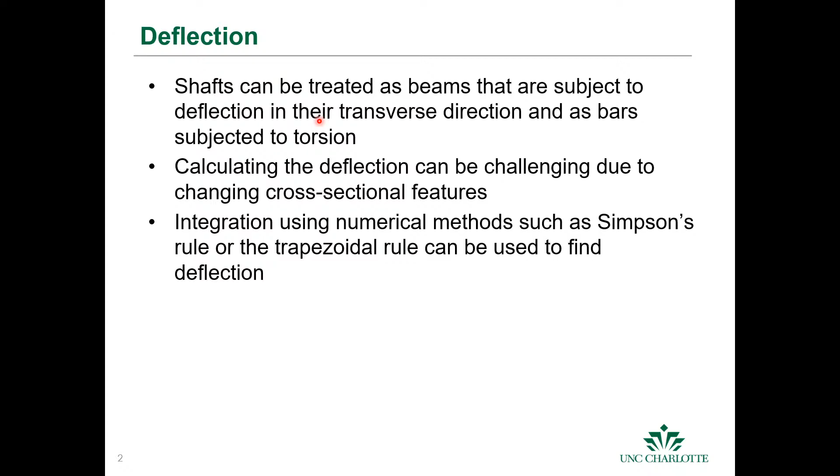When we need to calculate the deflection in a real design, it can actually be quite difficult because of the different cross sections, different cross-sectional areas, different attachments, and in that case there's an awful lot of software that can be used to simulate that using FEA. But an approach that you can do that's relatively simple, such as using numerical methods and an integration such as Simpson's or the trapezoidal rule, can be used to find the deflection. I'll show an example of that.

This is the same thing that we've seen before in statics, probably mechanics of materials, and earlier in this class. The angular deflection is the applied torque times the length of the shaft, over the shear modulus—which is the equivalent of the Young's modulus, except Young's modulus is axial and shear is in torsion—times the polar moment of inertia, or in other words, looking at the area moment of inertia distributed away from the axis that runs through the center of the shaft.

The ratio of the applied torque to the resulting angular deflection is the stiffness of the bar. If we apply a load and get a deflection, that's Hooke's law that we've seen in the linear case or with springs, and it's the same in the torsional case. If we apply a torque and get some unit of angular deflection, then that ratio is the stiffness.

It's a measure of how much the material angularly deforms for an applied torque, and we can rewrite that in terms of our deflection equation if we'd like. Then we can calculate the stiffness of a bar from its material properties, G, its cross-sectional area properties, J, and its length.

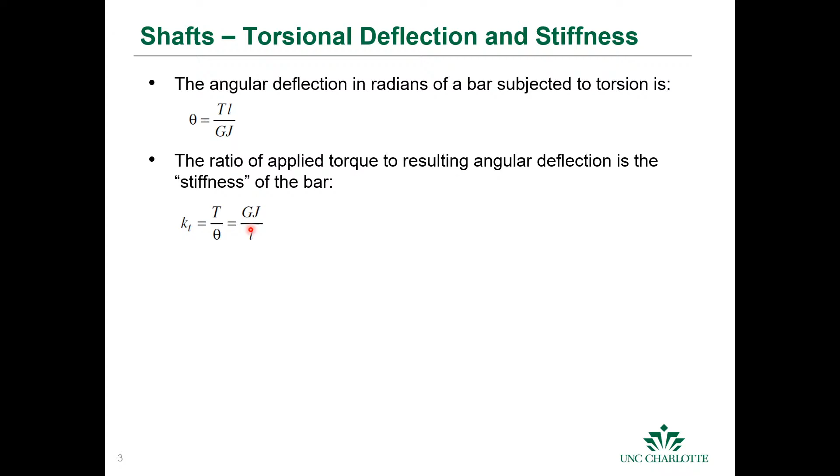If we have a changing cross-sectional area, as we do in many shafts, we have to deal with that by looking at the deflections experienced from each section of the shaft and treating them as springs in series. Our overall deflection will be the torque applied to the shaft over the shear modulus, assuming we all have the same properties.

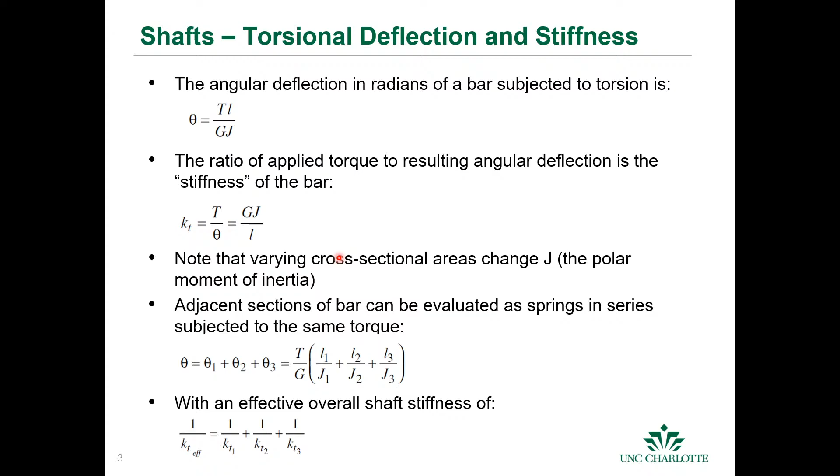If not, you would distribute that through for the respective properties, and then the length and the polar moment of inertia for each section of the shaft to get our overall deflection from the shaft. We can also treat it as an overall stiffness of the shaft, and use that to get a feel for how the shaft will deflect due to an applied load.

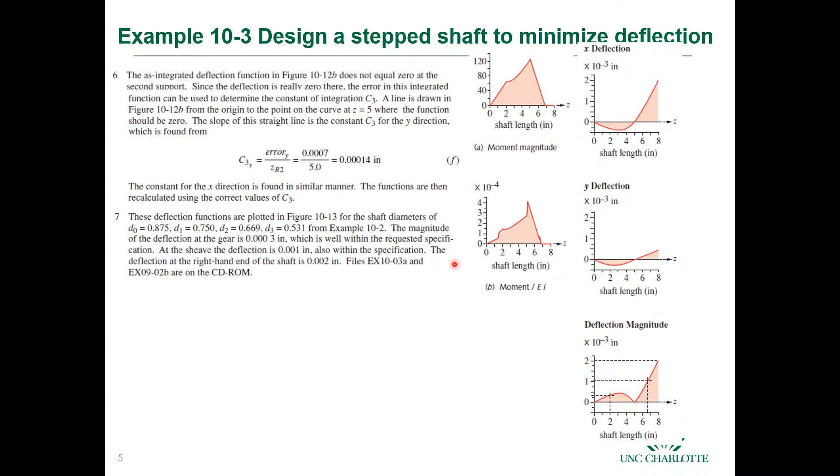I would go back through this and the previous example in 10-2, from the last section, and make sure that you understand what's going on.

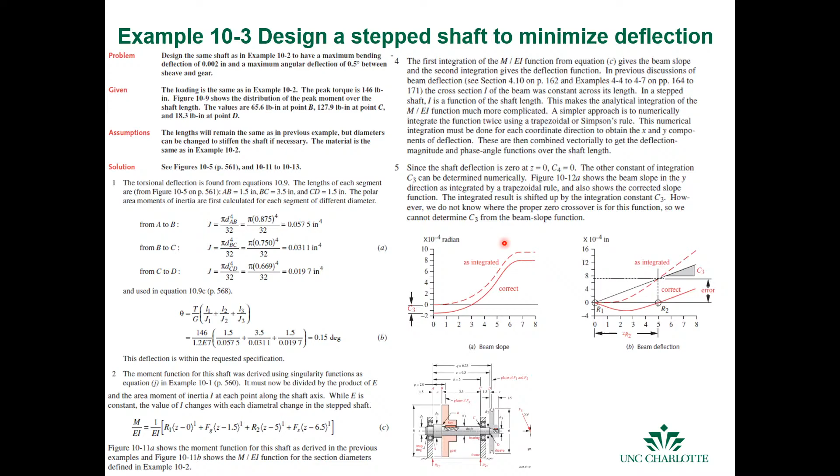So when we need to transmit torque through shafts, we could go from a shaft to a hub.

One way to transmit torque is to use a key. There are 3 common keys: parallel keys, tapered keys, and Woodruff keys. The ASME definition is that a key is a demountable machinery part which, when assembled into a key seat, provides a positive means of transmitting torque between the shaft and the hub. So if we have a shaft here and a hub that we need to spin around it, we can use a key to transmit the torque from the shaft to the hub.

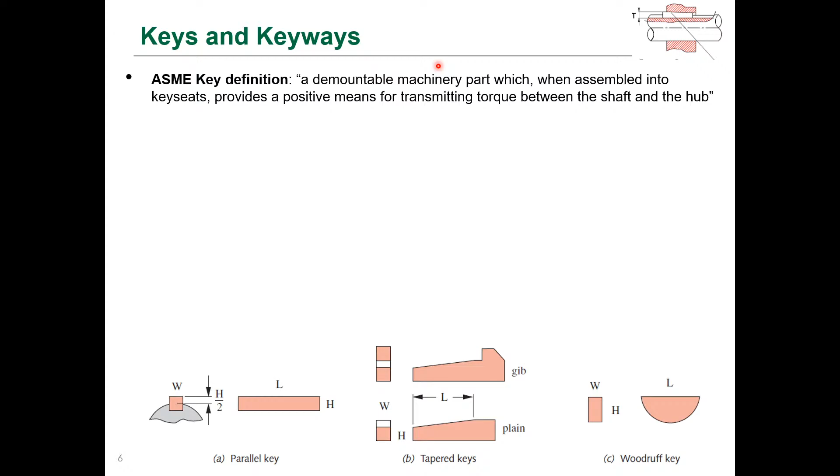Now, more area of the key is usually in the shaft than the hub, although the design guideline is to split the height between the shaft and the hub. So we have parallel keys. These are square keys, low cost, made with cold rolled steel, typically with a slightly negative tolerance, so that a 1/4 inch end mill can machine the slot into the shaft, for example. These are recommended for smaller shafts, up to 6.5 inches, or up to 25 millimeters if you're using the European standard or ISO.

The height is split between the shaft and the hub of the key. So you place the key in, you want half of it to sit in the shaft and half of it to slide into the hub. Then you slide the hub over the key, and you can spin the shaft and it'll move the hub. If you need to deal with higher loads, you can use 2 keys, one at the top, rotated at least 90 degrees so that you can transmit more torque. Otherwise, if you have too much torque, you'll cause the key to fail.

If you have alternating loads, there's a small tolerance in the key, between the key and the shaft and between the key and the hub. If you have a precision application and you apply a positive, clockwise torque, and then apply negative torque, it's possible that when you apply the opposite direction torque, you get a small delay before you get output angular displacement. That lag between the input and output is what we call backlash.

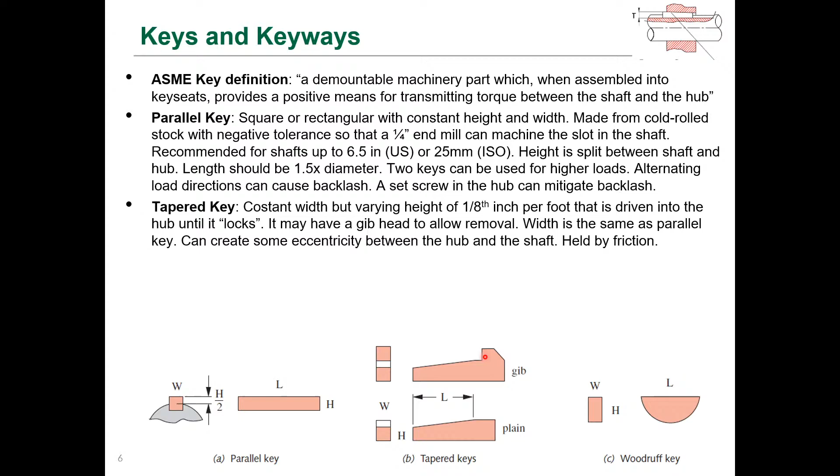We also have tapered keys. They have constant width, and the height varies 1/8 of an inch per foot that's driven into the hub until it locks. What you're really doing is kind of smashing the key in there. The hub itself will have a taper, so when you put the key in, it slides down that taper and seats inside the shaft. It's a way of locking it with friction. If you get your tolerances right, it'll snap in there and stay. Some have gibs, which are little knobs you can use to pry them out if you need to remove them, and these are held by friction.

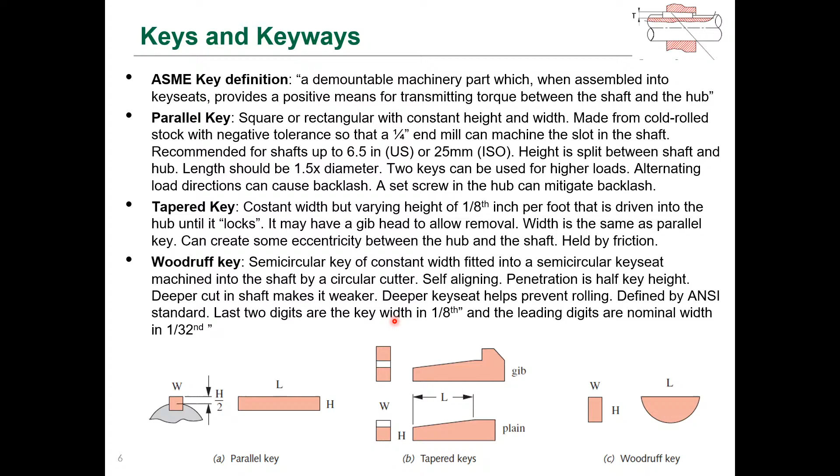We also have the Woodruff key, a semicircular key of constant width all the way down, and the penetration is half the key height. These are deeper cuts into the shaft with a circular cutter, making the shaft weaker, but putting more area of the key into the shaft. These are defined by the ANSI standard. They have a numerical value where the last two digits are in eighths of an inch, and the leading digits are in 1/32 of an inch, representing the nominal width. Actually, the first number is the length, so I need to fix that.

So these are some standard typical values that you might see. What's important is if you're designing a machine, you need to transmit the torque from the shaft to the hub. You have these range of values here, for the diameter of the shaft in inches, and you can see they're not recommended for keys over 6 inches.

This is the metric version, and if you come down here, you can see for a shaft that's 2 inches, you want a 1/2 inch wide key, and if you're going to use a set screw, you want a 1/2 inch set screw, which matches it. You'll see that the set screw size slightly lags the key width size, except at 1/2 inch.

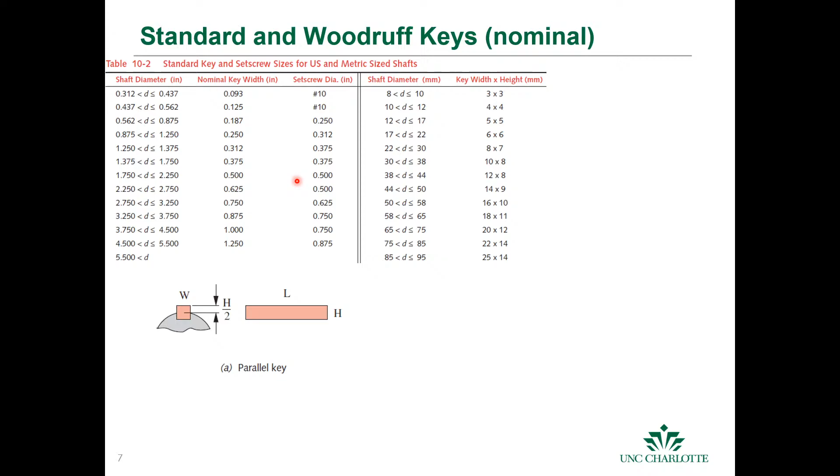The ANSI standard for Woodruff keys, as I said earlier, the numbers correspond to 32nds and 1/8. So 8/8 for the last two digits is 1, and 12/32 is 0.375, and that's how we get our key widths, but they come in the key number. So you can pick either the standard keys or Woodruff keys to transmit the loads. They're used in a variety of applications.

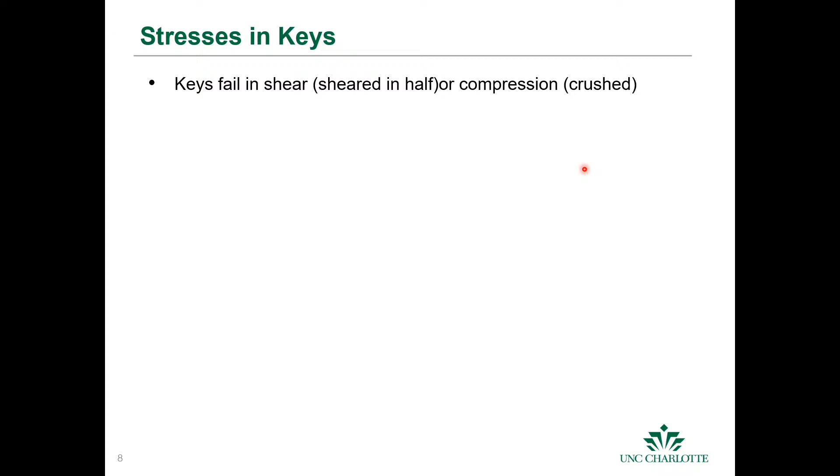Keys will fail either by shearing, where you rip it in half, or by crushing when you compress them or exceed their compressive yield strength.

For shear failure, it's easy. We just look at the force that's applied to half of the area of the key, and it's in simple shear. So the shaft is going to be on half the area, and the hub's going to be on the other half of the area, and the stress on each area is going to be the force over the area in shear.

Usually the area that you use for shear is going to be the smaller of the shaft or the hub areas, and that's because that's the area that's going to fail first, because you have the same force over a smaller area, meaning you're going to have higher stress.

If you have time-varying torque, then fatigue failure is possible, and you would have to compute the von Mises mean and alternating stresses, if you had, say, a mean stress with an alternating stress. Obviously, if you just have an alternating stress, you would actually be in shear, so you need to take into account those shear stresses with the von Mises equivalent stress, and then calculate your fatigue like that.

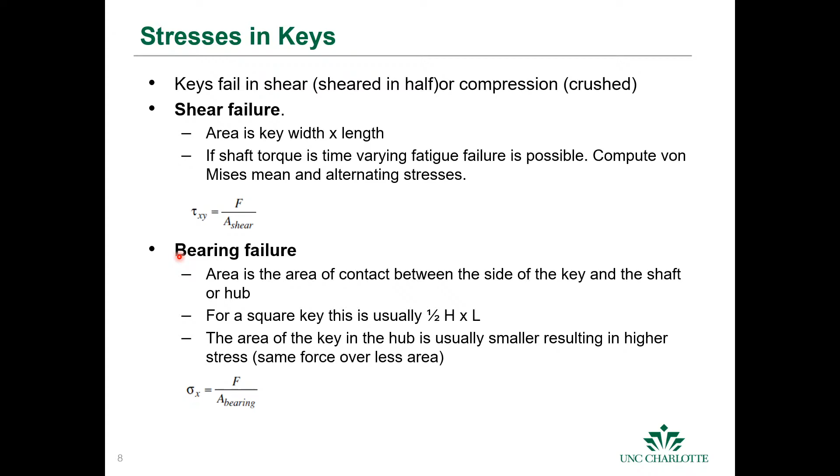Bearing failures are where the key is actually crushed. This area is actually the part of the key that's subjected to the shear. If we go back, it's actually this area that is the shear area, because that's the shear plane between the two surfaces.

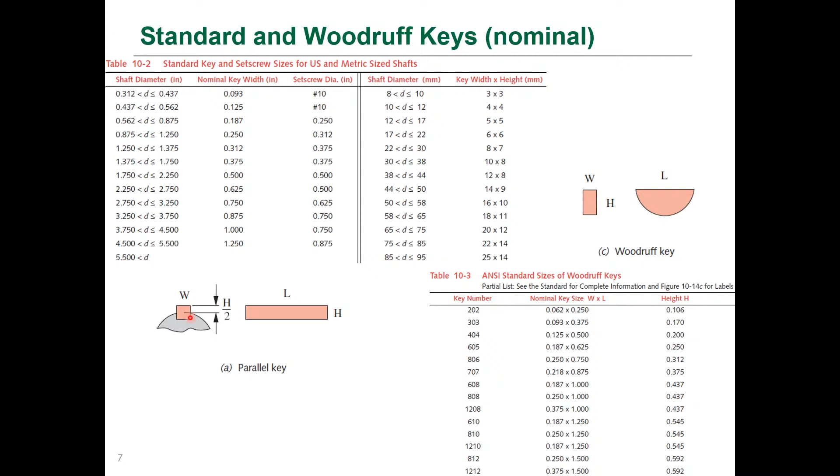If we look at the shear failure, we're looking at this area right here on the side of the key. In that case, it's the width times the length, and in the case of bearing failure, it's half the height times the length, and that's the side of the key. And that side, you obviously want to use the minimum of the area that it is in contact with, so usually that's in the hub.

And if you exceed the stress to cause it to yield, then you have compressive yield failure. So those are how keys fail.

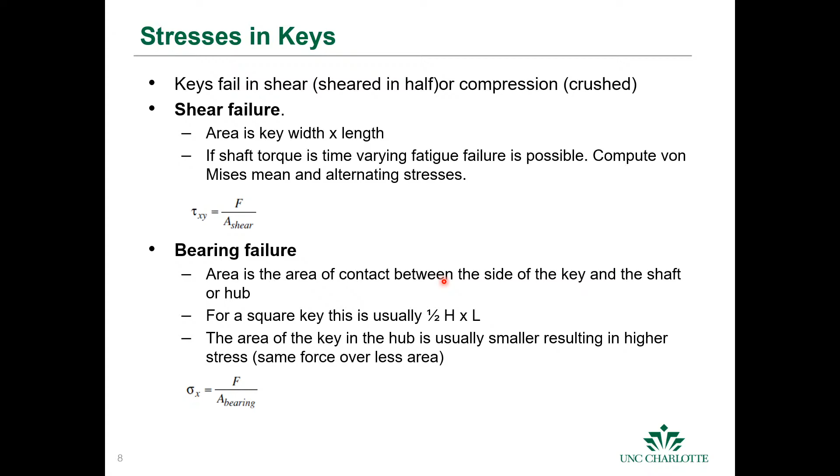They are also subjected to stress concentrations, as are everything else that has large changes in cross-sectional area. Since the keys are subjected to shear, they're typically made from softer, lower carbon, ductile steel. If you're going to be in a corrosive or marine environment, then you'd want to use brass or stainless. Square keys are typically made from cold rolled bar stock that are just cut to length, so they're pretty cheap, and they're designed to fail first.

As we saw for the standard keys, the diameter of the shaft determines the key width, and once the width is defined, the height is also defined by the standard keys. You can use a straight key, and that straight key can be as long as the shaft, but in general, you want it to be less than 1.5 times the diameter.

The reason for that is because you're going to have twisting due to torsional deflection, and you want to avoid excess twisting so that you don't twist the key out. So depending on your application, you just have to be aware of that: if you get the deflection and you have a long shaft, based upon the slides we saw at the beginning of this lecture, a longer shaft is going to have much larger deflection, and if you have a key that runs the whole way, then you're going to be twisting the key.

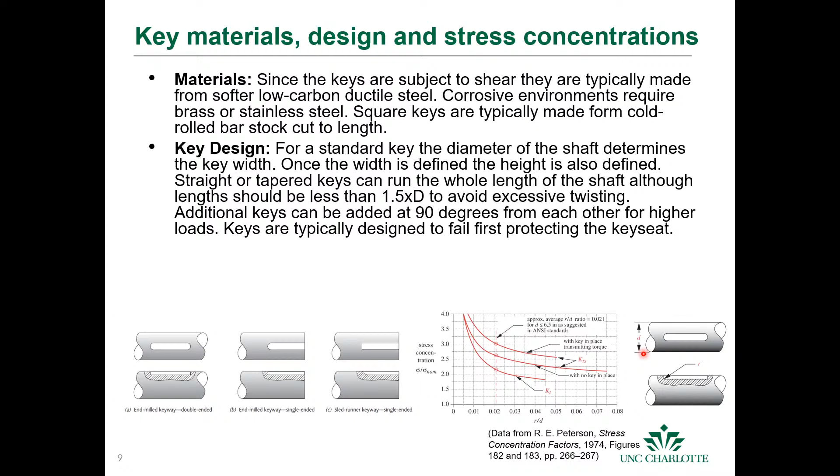These are the stress concentration factors. They're analyzed in the same way that we've done them. There's plenty of resources you can look up, but the point is that depending on the radius to diameter ratio for the key, then you'll get a factor that can be 2 to 4 times.

So what you might do, if you're trying to do a ballpark design, is just say that the stress is going to be about 4 times higher at the key. Or if you're designing something that's going to be transmitting loads, you can't just design the shaft—you have to consider how that shaft's going to transmit that load. It's going to use a key, so you can use a value of at least 2 up to 4 for a stress concentration, so that you're multiplying the stress you calculate by the actual way that you're going to use the machine.

And that's what's a little bit different about machine design, other than statics or mechanics of materials—to make the machine actually work, we have to use real hardware and real components. So these stress concentrations, even though we can calculate the stresses, we really have to pay attention to them and make sure that we are multiplying the stresses by an appropriate value. And obviously we'd use the limiting stress case of where we expect the part to fail, just like we do in all the other cases for stress concentrations.

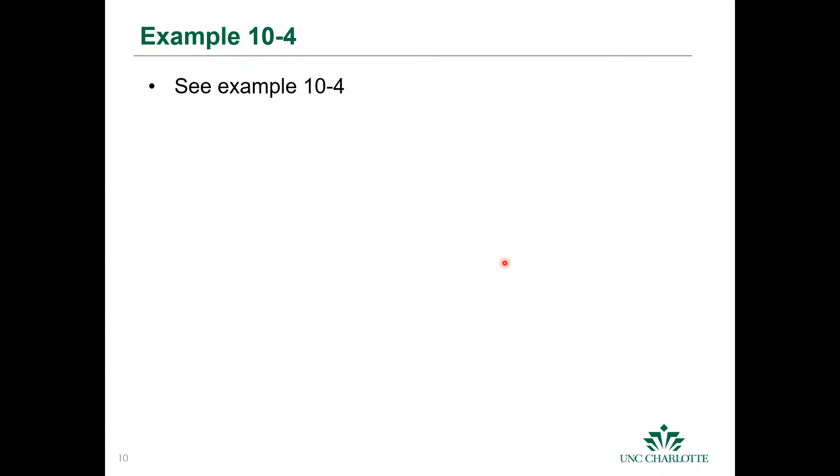At this point, I'd like to remind you to read your book. Your book is good. I try to do a good job of making the information more accessible through these lectures, but there's really no substitute for you to get into the material and read and make sure you understand, especially if there's something you don't understand about these slides.

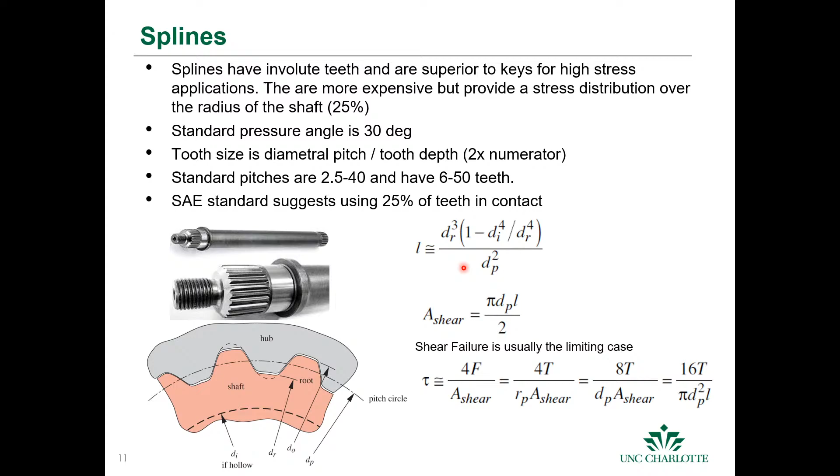All right, so now let's talk about interference fits.

Interference fits are another way for us to transmit torque. The torque is transmitted through friction. They're also used for locating pins and mounting bearings and a variety of other applications. This is the general case, particularly for shafts if we're trying to mount something on the shaft.

So what is an interference fit? An interference fit is either a press fit or a shrink fit. A press fit is where we have a shaft that's larger than the hub so that we have interference, and the hub is pressed on. If we maintain stresses that are below the yield stress, then we don't plastically deform the hub or the shaft when we join them, and we can get them to seat inside of each other. They get the shaft to seat inside of the hub, and then use friction to hold them together.

So if you've ever tried to remove a bearing, you know that a press fit can be a good way of joining a shaft, especially if it's a driven shaft and is fixed at the other end, so that you don't require any locating features and you have the bearing that's grounded. It's a good way.

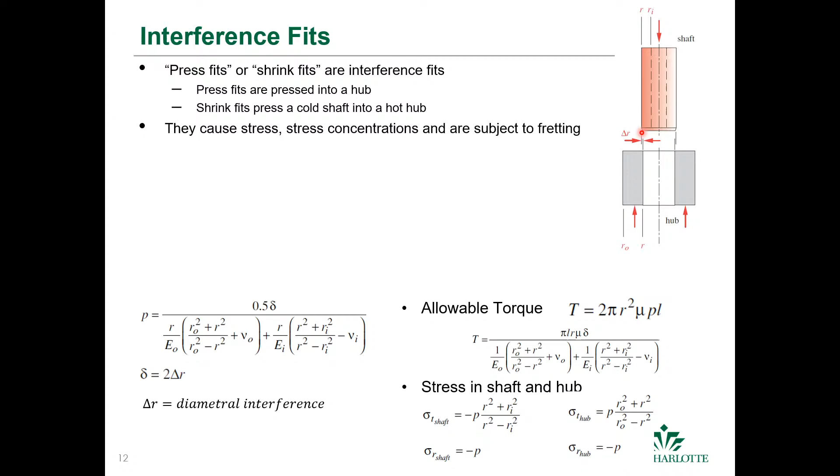When you use an interference fit, because you're causing two materials to interfere with each other, you're obviously going to get stress. That stress could cause other problems which relate to the surface failure lecture, which is actually uploaded to my site, and you also have a video of that from Norton, but we haven't discussed it yet. You can get fretting failure or corrosive fretting between the hub and the shaft when those two materials are rubbing against each other. They can cause surface cracks.

There's something called the rule of thousandths, and it says you want to be 1 to 2 thousandths units of interference per unit diameter. These are not inches, these are any units. Larger diameters use a 2-thousandths rule, and smaller diameters use a 1-thousandths rule.

These are not necessarily in inches. So if you have metric units, you still want the interference to be between 1 to 2 thousandths of the diameter. For example, if we have a 2-inch diameter shaft, we would want to have 4 thousandths of an inch of interference, because it's a larger diameter, so we use the 2-thousandths rule.

Between large diameter and small diameter, diameters up to 1 inch can use the 1-thousandth-of-an-inch rule. This is the machinist rule of thumb, which is different from the rule of thousandths, even though they have the same interpretation for some lengths. The machinist rule of thumb, if you're going to use a press fit, is 1 thousandth of an inch of interference, not clearance, interference, up to a 1-inch diameter shaft, and 2 thousandths of an inch for diameters from 2 to 4 inches in diameter.

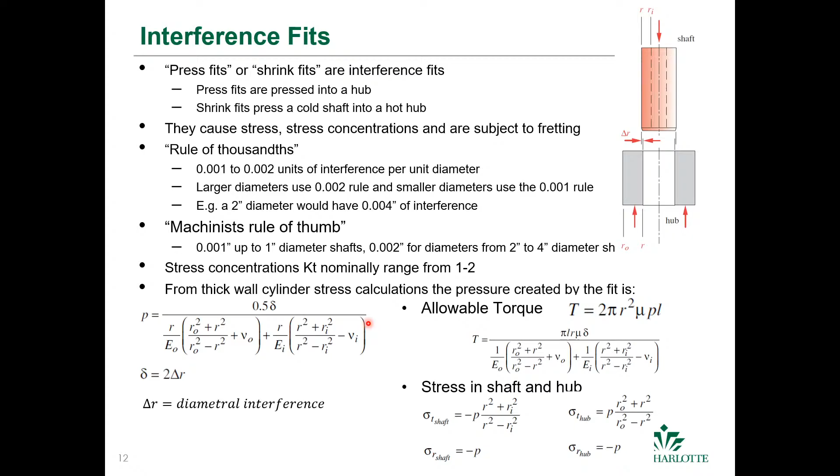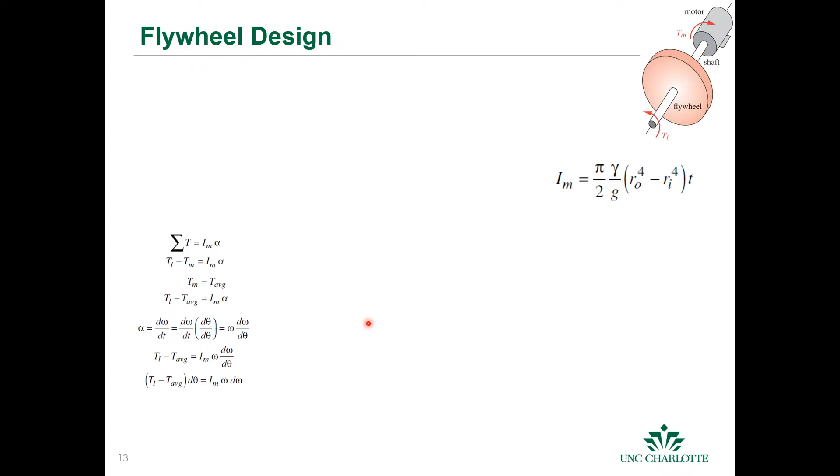All right, so now we're going to talk about flywheels. A flywheel is something that stores energy. Flywheels are used to store energy, and they're also used to smooth out speed variations due to torque fluctuations.

You can imagine if you have a motor applying some torque, and that torque is being transmitted through a shaft. If over here you have the torque of the load, or whatever you're trying to drive, and that torque varies over time, you don't necessarily want that torque reflected into the motor. If you're a little clever and suspect you're going to have a time-varying torque, you don't want it to negatively affect the speed.

Let's say you had ample torque for the load and to run the flywheel, you can add a flywheel, and that flywheel's inertia is going to store energy. So if this torque wants to slow down, we have all this energy that's spinning and wants to keep rotating, and it causes this torque to apply a reverse acting torque to kind of neutralize it.

The same thing is true if the load suddenly decreases and we end up applying a negative torque because the flywheel is going like this. That negative torque means the torque applied to the motor doesn't have to spin the whole flywheel and the load, so it's easier to spin the flywheel. So the flywheel stores energy.

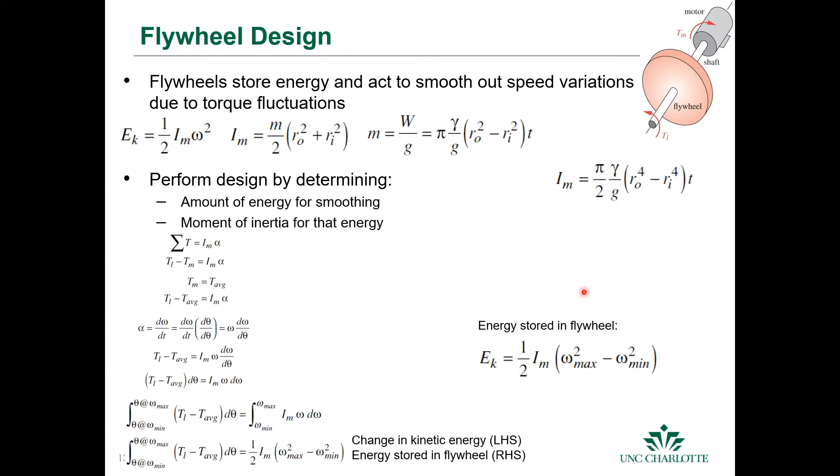What's done in practice is we want to minimize the fluctuation of the speed in the shaft. The fluctuation is the max minus the min speed, and we want to normalize that by introducing a coefficient of fluctuation. If the max speed equals the min speed, the coefficient is 0.

If the max minus the min is 1% to 5%, that would be a coefficient of fluctuation we'd want for, say, a precision machine. If we have a crushing machine where the flywheel has to store a lot of energy and then release a lot of it, we may make this much larger, about 0.2. So these are some ranges you can use.

Now, if we take the right-hand side equation where we have the kinetic energy stored in the flywheel, we can expand that out - basically expanding the second term here. When we do that, we get an expression, omega max plus omega min over 2, which is the same as the average angular speed, which we can plug back into the coefficient of fluctuation.

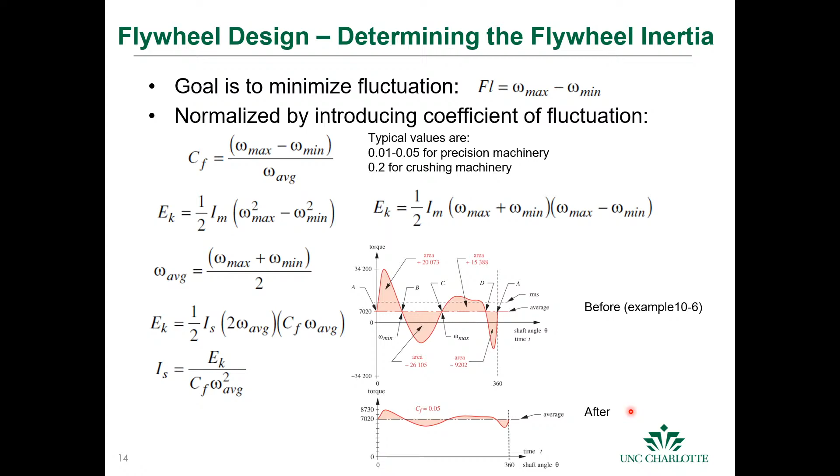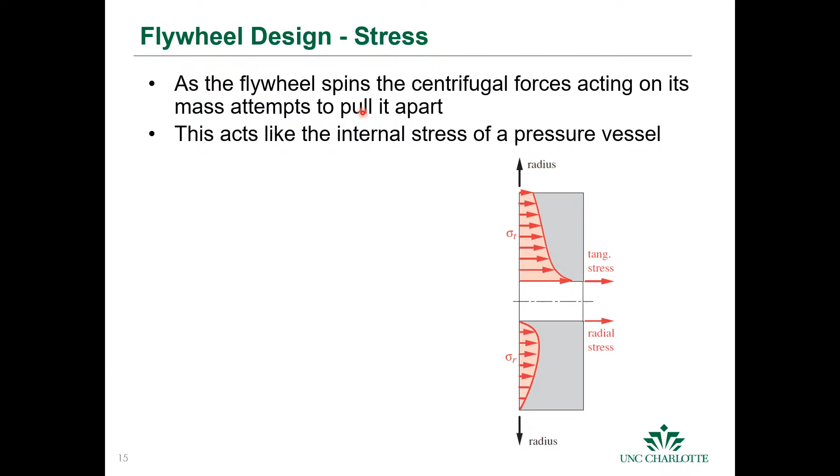This is how you can calculate that for a flywheel with just a disc on a shaft. This is your tangential stress, and this is your radial stress. They obviously mirror on each side, but this is your stress as a function of radius. This is your tangential stress here. The max stress is due to your tangential stress, typically, and that is on the inside of the flywheel. You do not want to have something spinning at 20,000 RPM and then fail from the inside out.

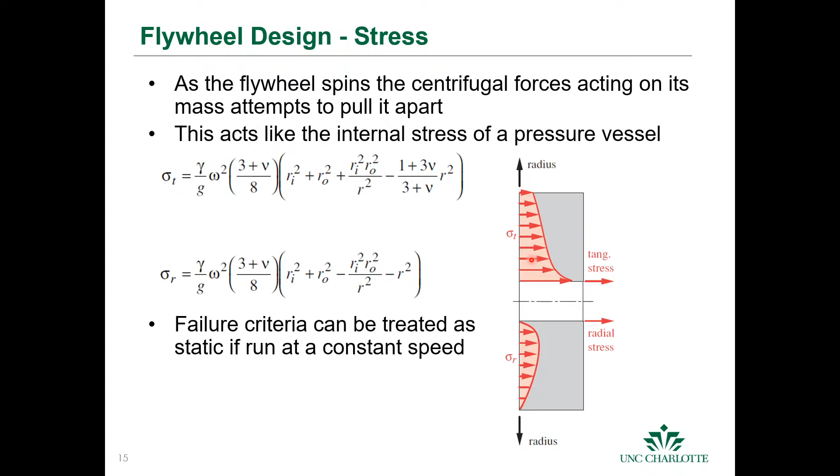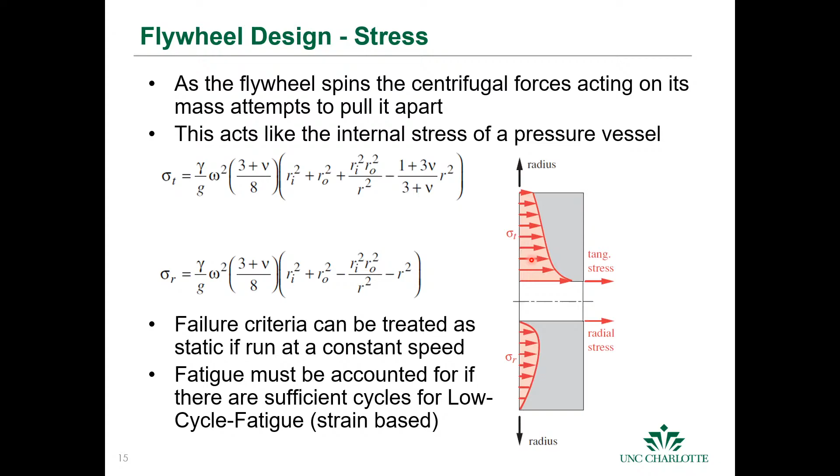If the flywheel runs at a constant speed, then it's reasonable to treat this as a static stress and do the static stress analysis. If your flywheel or application is starting and stopping a lot, then you've got to calculate that tangential stress and account for fatigue. Obviously it's unlikely your motor will be starting and stopping on the order of 10 to the 8, like we use for some fatigue life calculations, or 10 to the 6 revolutions like we use for high cycle fatigue. So you may have to use a low cycle fatigue, strain-based analysis to evaluate that.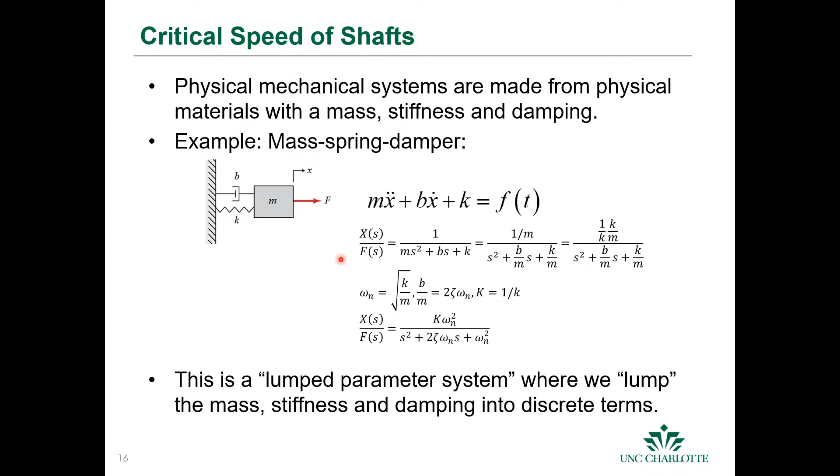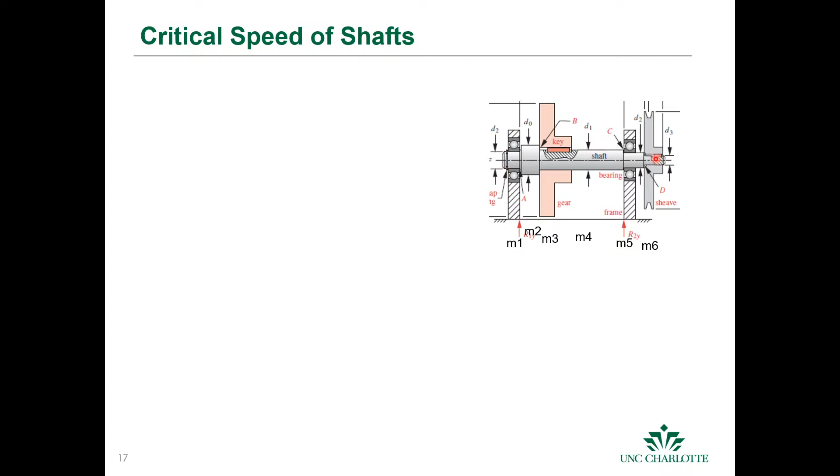But what do we do when we have a shaft system? Well, it turns out that we can kind of treat this as mass 1, this is mass 2, this is mass 3, this is mass 4, this is mass 5, and go on from there. So continuous systems such as shafts can be thought of as an infinite number of lumped parameter systems, and that's similar to how finite elements work, but not exactly.

What that means, though, is if we treat these as each different masses, then each one of these is going to have its own natural frequency. In this case, since this is a shaft, and often the loads are applied in torque, we're going to have 3 different modes of vibration, which we'll get into. But because this is not just a simple mass spring damper system, but a continuous mass system that has inherent damping and inherent stiffness, it'll have an infinite number of natural frequencies for this system.

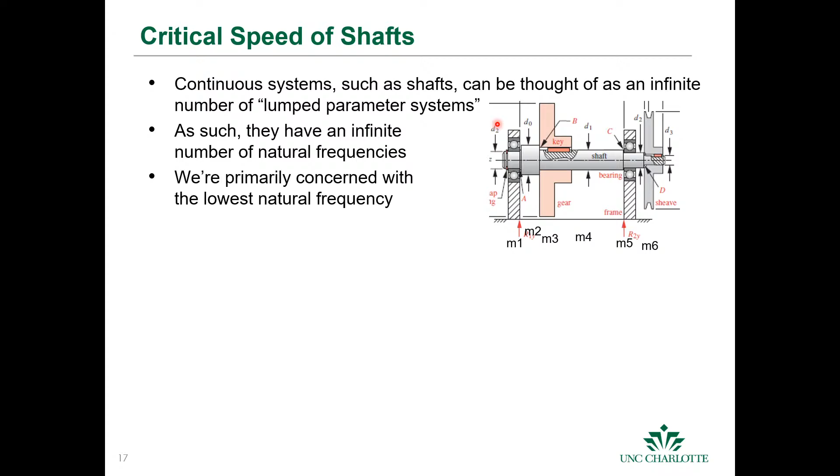So when you build a machine, you are building into it the natural frequencies of the machine. The only way to change the natural frequencies is to change your machine, to change your geometry. But we are primarily concerned for most all machines with the lowest natural frequency, or what's called the fundamental frequency. So when a system is driven either by an applied torque or external forcing function or environmental forces or whatever, or self-excitation...

Self-excitation can happen if, like, you had a chip in your mass that's rotating around the gear. So then you get an imbalance in mass, and then you get a time-varying torque, and that causes the thing to swirl. We'll talk about that.

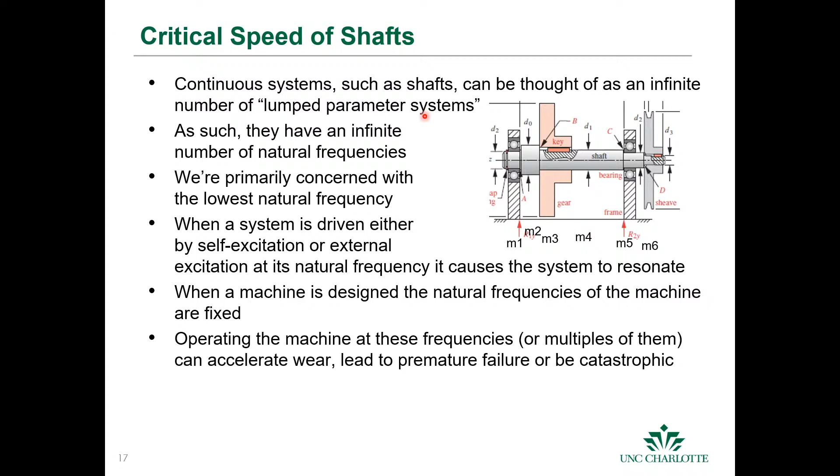So when a system is driven either by self-excitation or external excitation at its natural frequency, that causes the system to resonate. We already said that. So when you operate a machine, you do not want to operate at the natural frequencies. You do not want to be anywhere close to them, because you can have catastrophic failure, premature wear, etc.

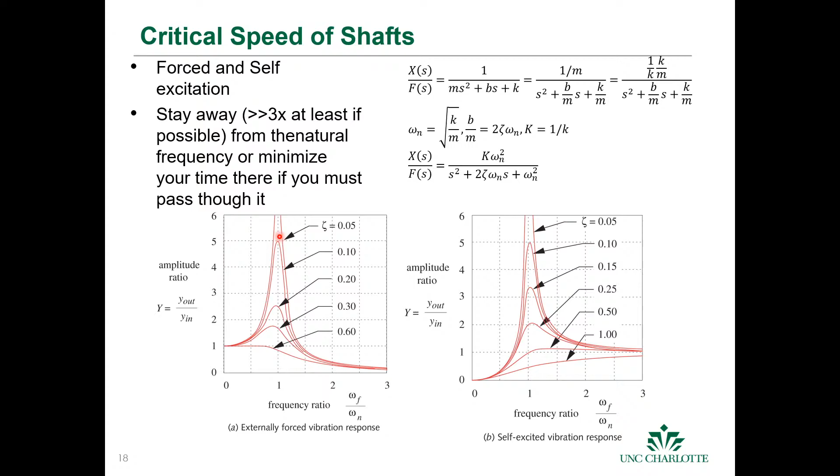So there are 3 natural frequencies to be concerned about. The first one is torsional. I turned this sideways so it's like a shaft, but if you have some oscillation here, it can rotate about the disc, about the axis. That's the torsional vibration. You can also have lateral vibration.

That lateral vibration is due to vibration input. If you're shaking a system, you can excite it at its natural frequency. You can also have swirl. Let's say you put some big mass on your system and cause it to deflect, making it a little eccentric. When it spins, it's going to spin around that axis, show up on the other side, and you get that thing to swirl around the axis.

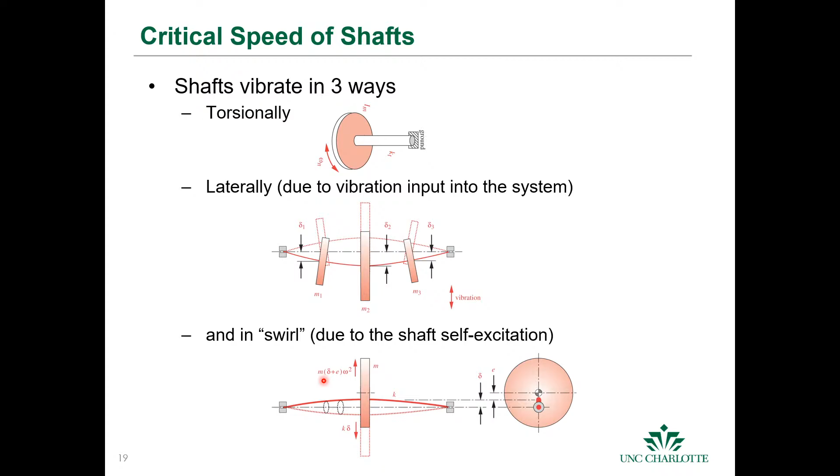We'll talk about each one of these. Usually, if you have a complex system, you're going to use FEA. You put the masses and everything on there, and then take a look at the deflections. Before these tools were available, people had to do back-of-the-envelope calculations, and you can still do that today pretty simply using Rayleigh's method, which is accurate within a reasonable percentage, just a few percent.

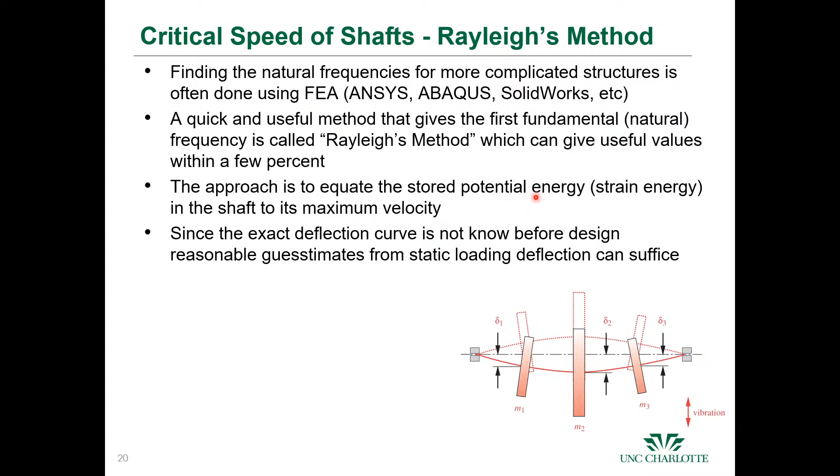This approach is similar to how we did the design for the flywheel. We basically equate the stored potential energy, the strain energy, to the energy at maximum velocity. Now, just like other design problems that can be really frustrating, you don't know what the deflection is going to be before you do the design. So how are you going to get your natural frequencies?

You can guess what they're going to be based on experience or based upon a simplified case. If you don't want to go through all the geometry and definition, you can put a shaft in SolidWorks, throw some masses on there, apply a load of what you think it'll be, apply properties for a certain material you're going to use, and do the static analysis, then look at those deflections.

So for example, in this case where we have 3 different masses, you can model that up in SolidWorks pretty quickly and get estimates for the deflections, or you can use the singularity functions, write yourself a little program, and then get the deflections from there.

Then what you can do is say the potential energy of the system is going to be 1/2 the mass times the gravity. So mg is a weight, that's a force, times the distance, and you can use the different distances. So this is force times distance here, and that's your stored energy.

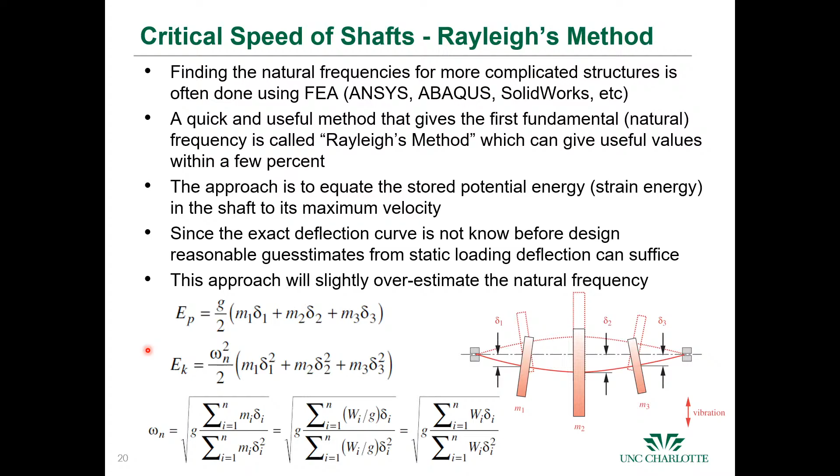So that is the lateral vibration, that's this case here, the lateral vibration. We can also have shaft whirl. If we apply a mass onto a shaft and it deflects, it's going to come down here, and then when we spin it, it's going to come all the way around. So we're going to have this shaft whirl.

And in this case, we do something similar where we say that the stored energy, which is force times the distance, is equal to mv squared. In this case, we have this distance here times omega squared. So we can equate the stored energy, the left-hand side, with the kinetic energy, and we can get an expression for how far down it's going to go, or an expression for the deflection over the eccentricity in terms of the natural frequencies.

This happens when we have masses that are not perfectly distributed around the center of the axis. So when we have a mass that's not centered around the center of the axis, that's when we get this. And what's interesting is we have this 1 minus term, so when we cross over a natural frequency it actually starts going the other way, we get a 180-degree phase shift. So it'll be going like this, and then you pass through the natural frequency and it'll go the other way. So if you hit a natural frequency, you get that phase change.

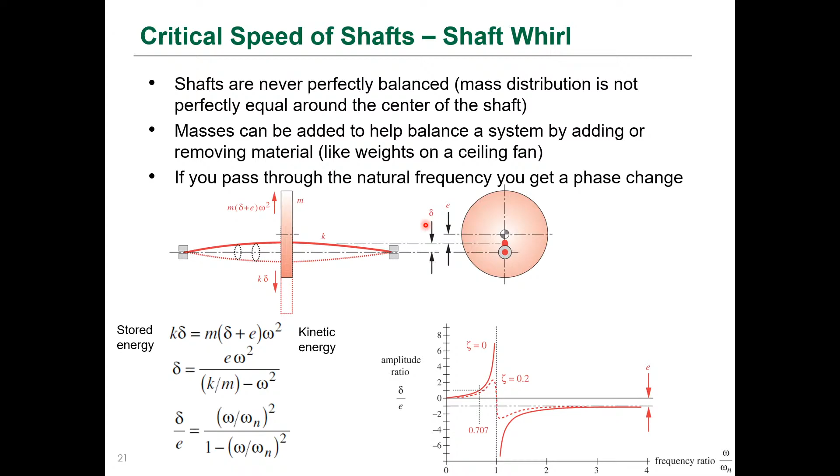This is just the torsional vibration where omega is the square root of k over Im. We have the stiffness that we defined earlier, this is the polar moment of inertia for a circular cross section, the moment of inertia for a circular shaft, and this is the effective polar moment of inertia if we have more than one shaft on there. Using those values of KT and IM, we can actually calculate the natural frequency for a mass rotating around a disk.

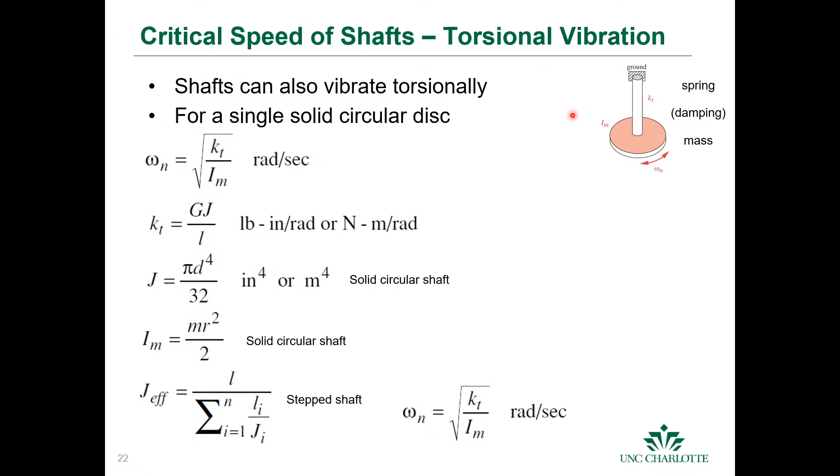So if we want to consider the natural frequency of 2 disks on a shaft, we can do that by finding this location here, and that location is going to be where the natural frequencies of these two are the same. That's going to be the natural frequency of oscillation. If you do this, you can solve for that location, and then use it to find the natural frequency of that system in terms of the stiffness of that system and the moment of inertia for both disks.

If you have 3 masses, you can use this equation here.

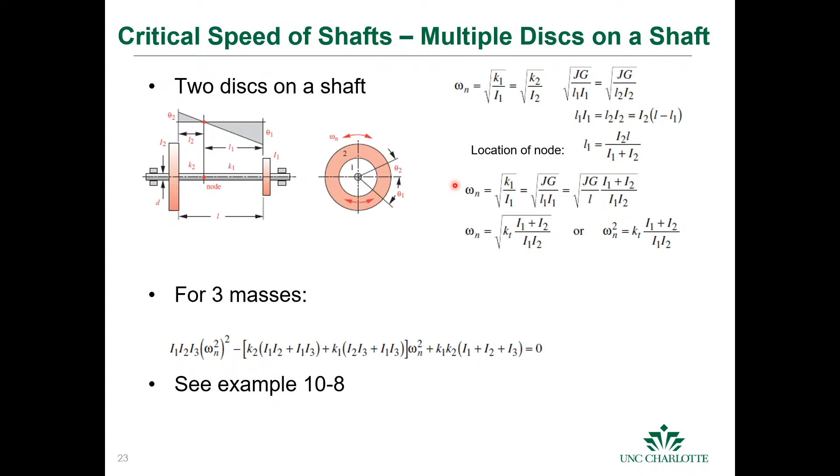Last thing I want to do, and I know we're already a few minutes over, but bear with me, I just want to show you a couple pictures, and those are couplings. We use 2 different main types of couplings. They can be separated into rigid couplings and flexible couplings.

These are pictures of rigid couplings. The point is to fix the shaft perfectly, clamp it down, and try to get the shaft to be as one uniform piece of material. These are widely used. Obviously, the friction has to be high enough so that it doesn't slip.

This is another type of rigid coupling, where you use keyways on the inside of the hubs. You face them towards each other so they can't get out, and then you lock them together. So this is a shaft that's coupled, using tapered collets to smash into there, and you can have the key go through the material as well, or just have it so that as you tighten it, it goes up the ramp and increases the compressive forces.

We also have compliant couplings, and compliant couplings are designed based on their application, which is to deal with axial misalignment, angular misalignment, parallel misalignment, and torsional misalignment.

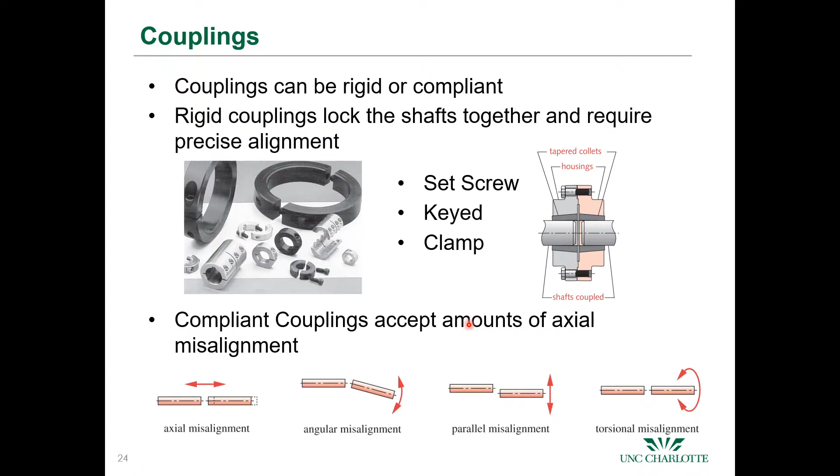These are the different types, and this is my last slide. You can have jaw, flexible disc, gear spline, helical, metal bellows, Schmidt offset, and hooks. I've seen an awful lot of these for small stepper motor applications, and I've seen these on some bigger, slower moving machines. But here are the different compliant couplings, and they have their different benefits.

If you don't have a perfect alignment of the shaft, this is a guide to help you pick which shaft coupling, which compliant coupling, to use if you have this type of misalignment. You can have axial, angular, parallel, and torsional misalignments. That's what we showed here - those are the 4 types of misalignments. And based upon those, that's what you could do.

If you only have axial misalignment, then you can use a rigid coupling - that's what we saw first. If you have a small bit of axial, small bit of angular less than 2 degrees, and a slight parallel misalignment, and a moderate torsional misalignment, then you can use a jaw type coupling. This allows you to transmit torque through a system where you have some misalignment issues.

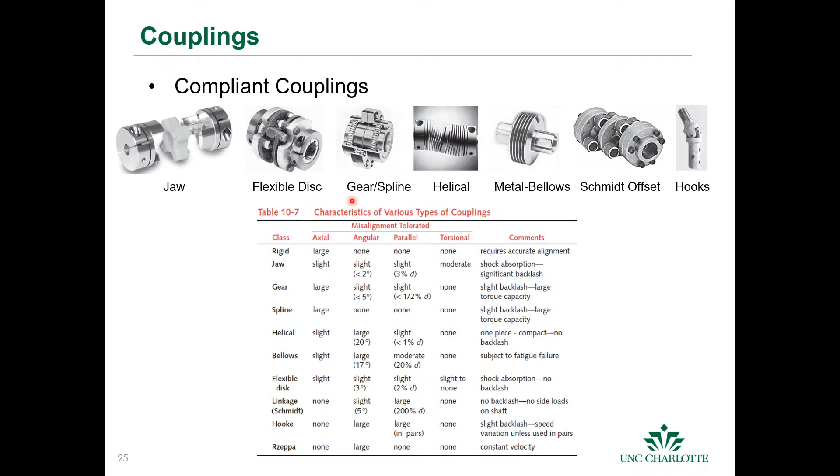I won't read the rest of them, you can look at them. This is a guide. You just need to be aware that if you're designing a machine and you have to transmit torque and you have some misalignment, you probably don't want to use a rigid coupling. You probably want to use a compliant coupling, but there are sacrifices - you're not going to have the ability in general to transmit the same amount of load.